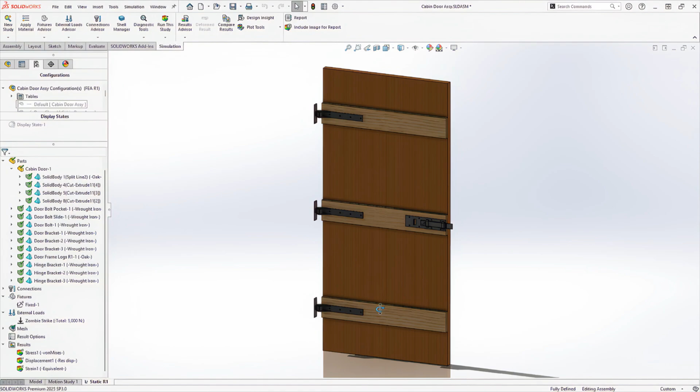The initial strike caused high stress at the sliding bolt and upper hinge, but our zombie can see that the door won't fail with a single hit. The factor of safety is too high.

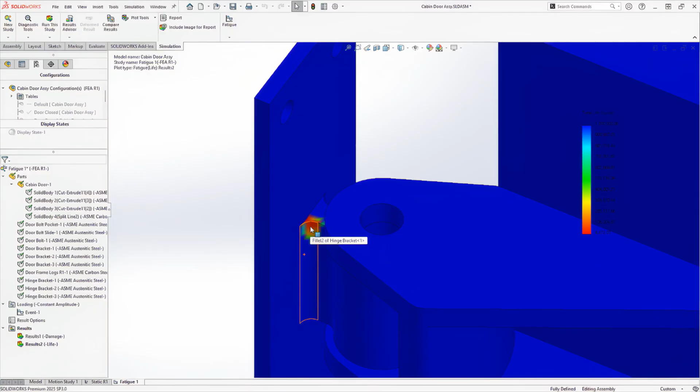Undaunted, our zombie runs a quick fatigue analysis to determine how many hits it will take to break the door down. 6,672 load cycles to failure. With 1 strike per second, that will take nearly 2 hours until the door fails.

Way too long. Either dinner escapes, springs a trap, or a zombie arm falls off. But our zombie isn't done yet.

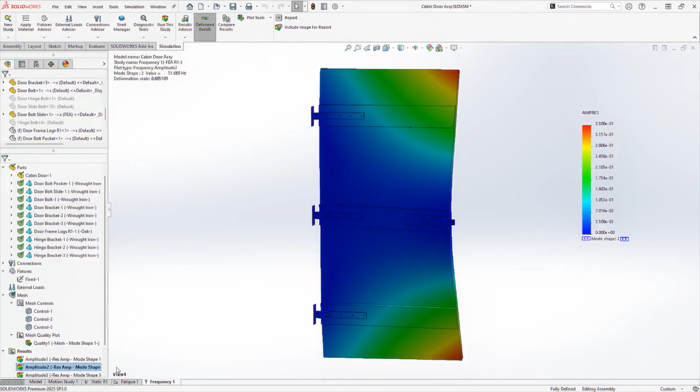He runs a frequency analysis to discover the door's weakest point. The first 2 modes involve a lot of the door's mass.

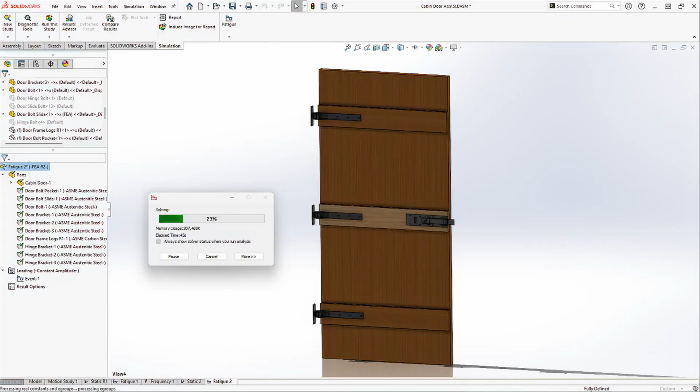Striking the door high or low on the side opposite the hinges will hit the weakest point, ensuring less force is absorbed by the door and more is transmitted to the hinges and sliding bolt. Time for a stress and fatigue analysis to confirm assumptions.

1,089 load cycles to failure, down to 18 minutes. This is manageable, and a bigger, more powerful zombie friend would reduce the time to failure even more.

The zombies make their final approach, confident in the plan. But wait, what's this in the window? An engineering workstation?

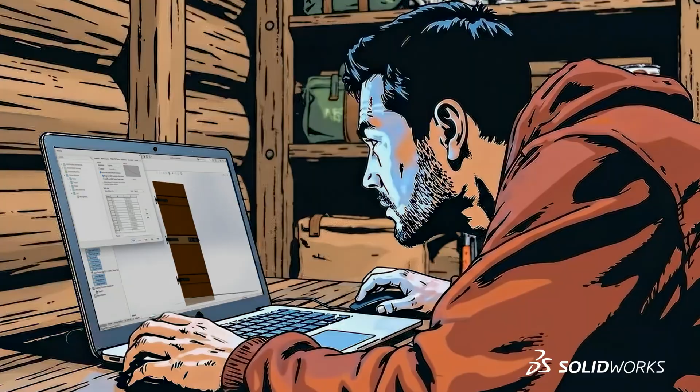It appears Dinner is actually a SOLIDWORKS expert, fully prepared for this scenario. They're finally here.